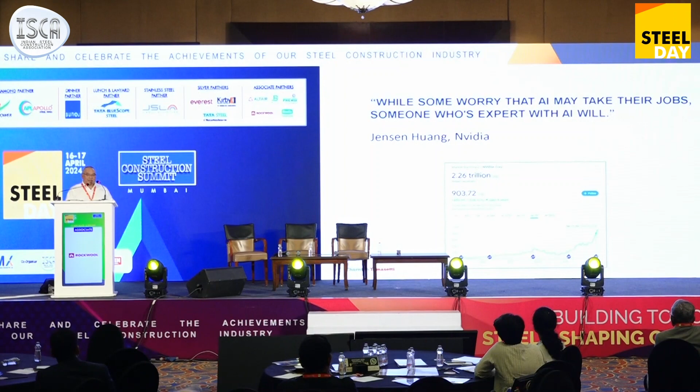So this is a statement from the CEO of NVIDIA, Jensen Huang, who says that while some worry that AI may take their jobs, someone who's an expert in AI will. And I think that's very true. He's growing his company at ridiculous speed, and there's no end in sight.

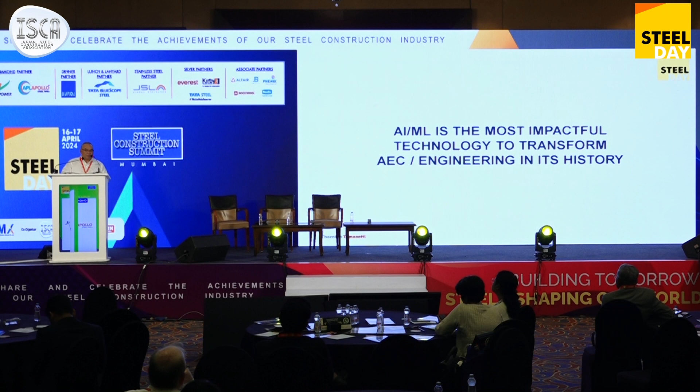This is my statement, having been an engineer for over 30 years now. It is the most impactful technology that will transform, and the reason why I say that, it's not just technical aspects, it's also marketing, it's going to also impact finance, human resources and recruiting. It's going to be spread throughout the entirety of the business of engineering.

So I want to show you some applications. And again, as I mentioned, at the crux of machine learning is data and data science, which is the part that trains the model. That's the artificial part, by the way. But the actual data, the solved solutions, are real. So if you can fit a very nice curve through a series of data, and then you ask that data a question, it gives you an answer from those solved solutions, and that becomes very powerful.

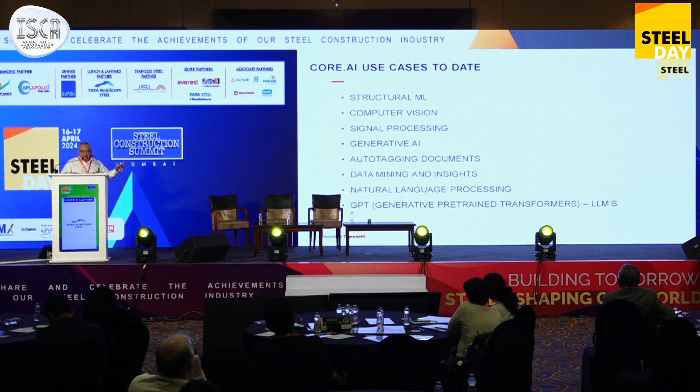So these are just the types of machine learning we've been doing and researching in our office. But I want to show you some. So this is 2018. We built a software called Asterisk. Asterisk was based on about 3 years of research that we had done.

And this designs a full high-rise building with a reasonable accuracy, probably 80 to 85% accuracy, in under a minute. All we needed was the massing of the building and the core dimensions, and it would design the building, either concrete or steel, using machine learning, all machine learning.

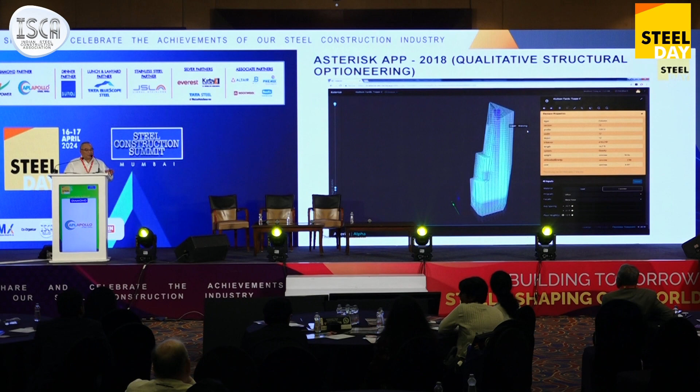The critical aspect of this is that what we wanted to do, and what was very new at the time in 2018, was something called qualitative analysis, or structural optioneering, as we called it. So instead of doing one design or two designs and then saying, okay, I'm going to take the best aspects of each, we can do 20 designs in a matter of hours, and then do a comparison of those 20 options to then optimize, if you will, that particular design and move on.

This example, what you see here is a building that we designed called 10 Hudson Yards in New York City. And in fact, the machine learning did show that concrete was the cheaper option, and that's the option that they actually used. Now, we did this study after it was designed, but it just demonstrated that this type of technology could be used and should be used in the future of engineering.

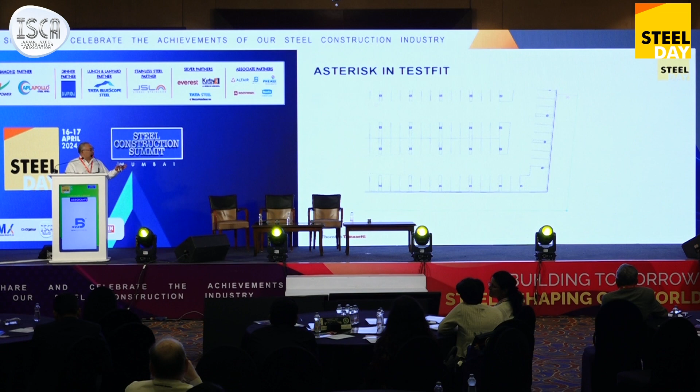Fast forward a few years after that, our machine learning model for concrete columns is embedded in a commercial software called TestFit. So this is a parking garage module that, as they're moving around the parking spaces and the dimensions of the columns and the number of floors, the columns are changing instantaneously. And I've checked those myself, so I know they're right.

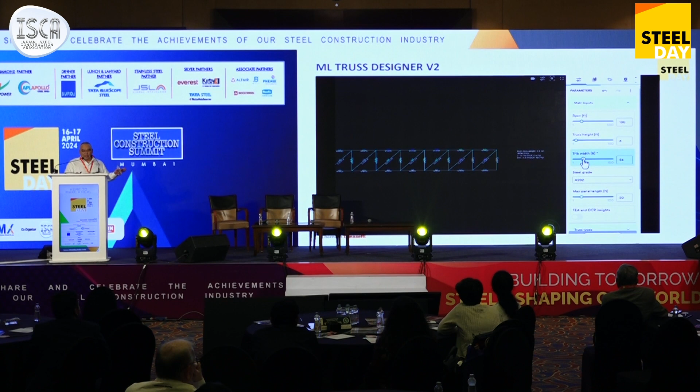So this is our latest truss designer. What this is doing is we actually built an FEA solver that is doing a structural analysis calculating the forces, but then pointing those forces to our trained models that design steel members and instantaneously resizing the members based on the geometry of that particular truss. Now, an engineer can do a truss like this in maybe a few hours if they're very good. This is doing it in a few seconds.

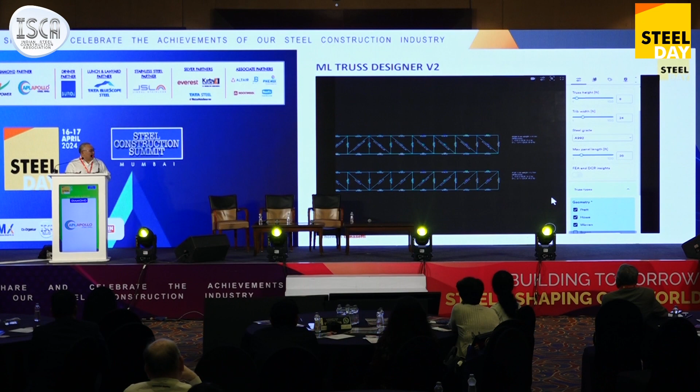And we can change the type of members with W10s, W14s, double angles, various geometric options. And this is near real time that you're seeing here in this video. And so the validation of these we do with commercial software. This is SAP 2000, a CSI product, and we're within 5%. And for those early phases of design, within 5% is absolutely, totally fine.

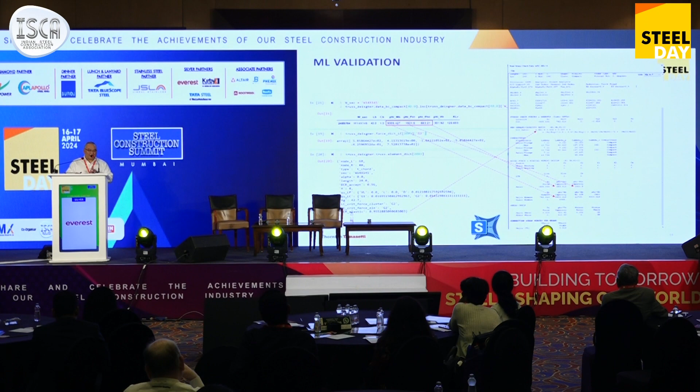We also do more conventional methods. This is called confusion matrix analysis of what the tool predicts versus what the answer actually is. And when you see these very clean 45-degree angles, that means the answers are almost always predicting what the data set we had.

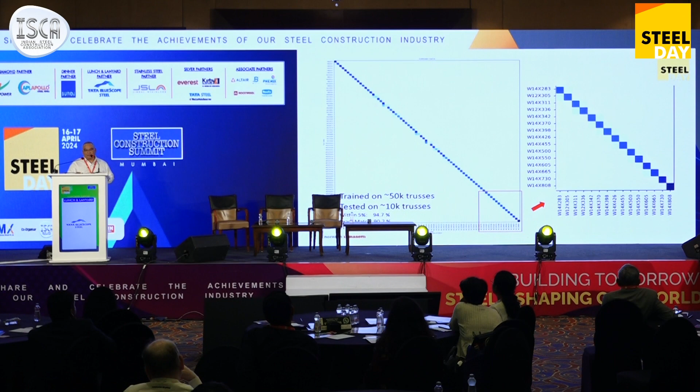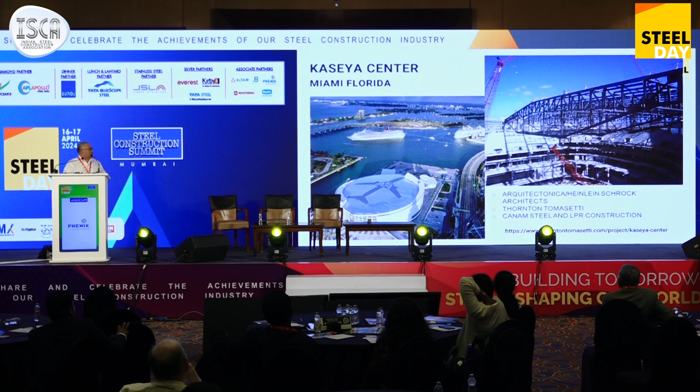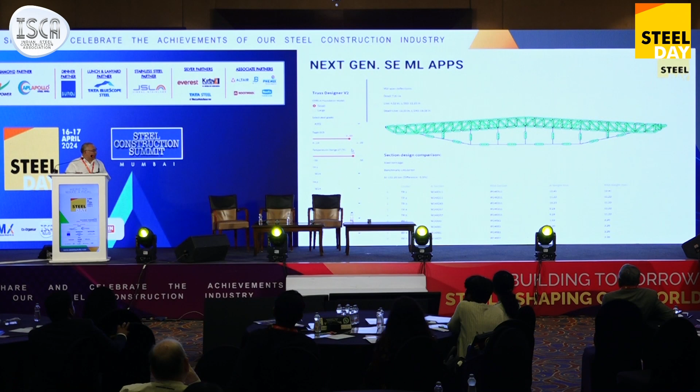This is a design that I did in 1997, or 98, I think it was, using 2D methods. It's in Miami, Florida. And it took me a long, long time to design this truss, I can tell you that. 372-foot span truss. We pointed that same analysis: we're doing an FEA in the background, calling our machine learning model for sizing of members, beam column trusses, and the analysis was within 5% of what I predicted, full design at CD level in 1997. So the power is there and the speed is there.

This is a ubiquitous concentric brace frame. This is a data set that we generated that calculates strength, stiffness, and optimizes using virtual work for this concentric brace frame. Each level has a family of member sizes. It's very advanced machine learning. And again, an engineer could do this in probably 6 to 8 hours or so, but we're doing it in minutes. Machine learning, by the way, is never 100% right. It'll get you close. But at early design phases, when it's very iterative, that's very powerful.

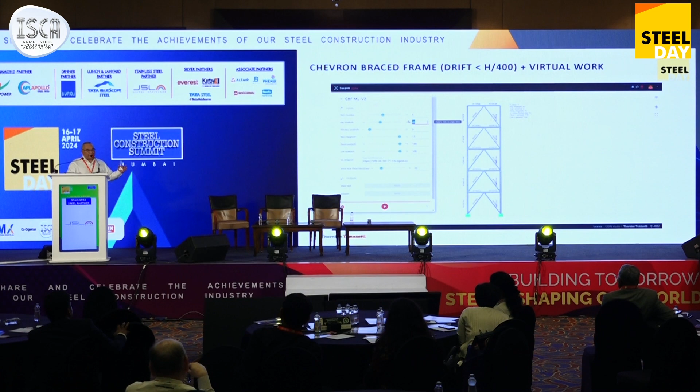This is office floor steel design that we trained using code-based results, but then fed it into a machine learning model. It understands corner bays versus exterior bays versus interior bays, and has the vibration analysis built into the results for office loading. And we can change the dimensions of those bays, and it instantaneously resizes. And the results are within less than 5%, actually, to real commercial software results.

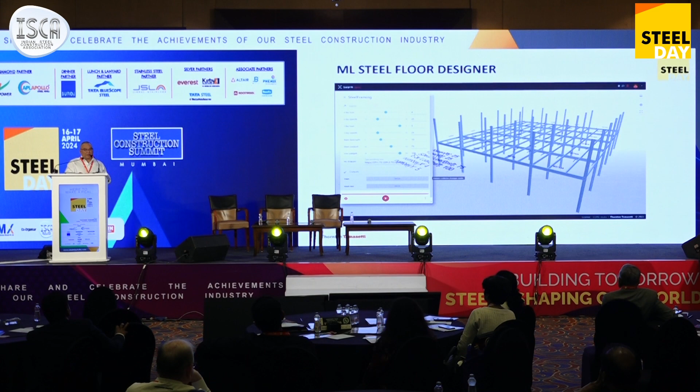So, full disclosure, we haven't completely rolled this out to the entirety of the firm. We are still testing with sort of the more advanced engineers in the office, because there is an additional aspect of AI that we need to train engineers how to use it and how not to use it. It's because it is not 100% correct. I would also argue that there's no engineering designs that are 100% correct anyway, but that's a different story.

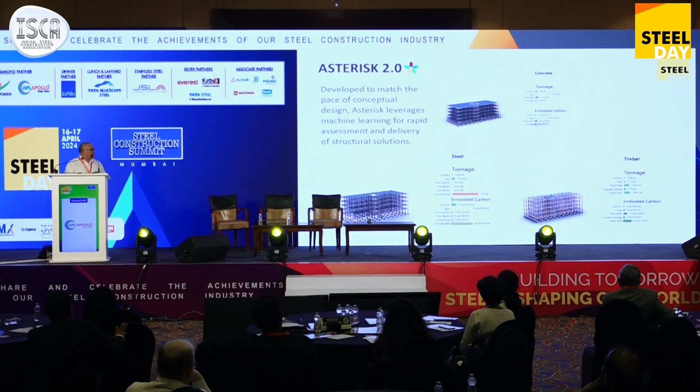So we have now trained timber, steel, and concrete for the majority of structural members, or almost all the structural members of a building, for both gravity and lateral. And as I mentioned, our software is now embedded in this other commercial software called Skema, which is a new startup that does, for now, residential design. But you will see here how it works. It's very much like our Asterisk in 2018.

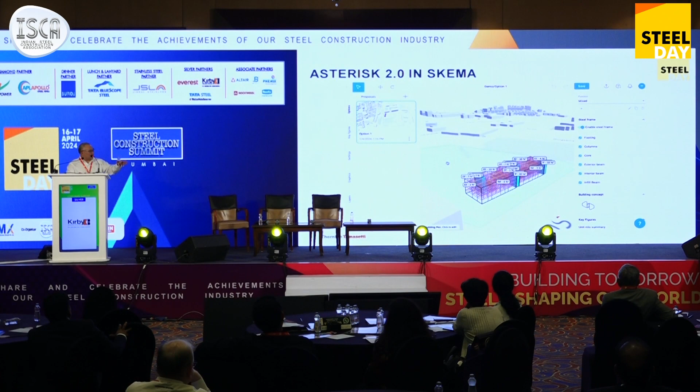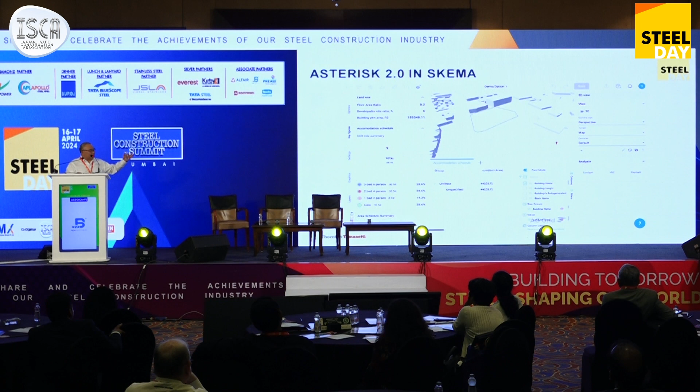It does a massing. It sort of splits the building up into 2 bedrooms, 3 bedrooms, and studios. It calls our machine learning models and instantiates the members in the building. So this is not meant to give the designer or the architect or the developer the exact member sizes. It's going to be about the depth of the member, the estimated weight of the structural steel. Again, we have concrete and timber as well if we want, but for now they have steel in there.

This is what I'm actually very excited about. So what we've done is, Thornton Tomasetti had a very vetted plate girder designer, and we took the logic out of the Excel spreadsheet, created millions and millions of results for plate girders, and now all we need to do is give a moment and shear.

I fixed it at a design capacity ratio of 0.8, and using generative AI, which is very much the technology behind ChatGPT, it's predicting any number of designs that actually work: deep members, shallow members, fat members, and we're post-processing and calculating the weight per foot of the members, as well as, for the engineers out there, the shear flow, so the weld that is required to make those members composite.

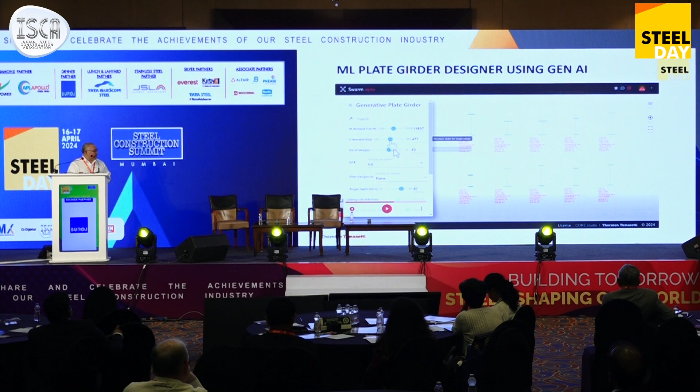So I think it was Anand who teed it up for me about AI predicting connections. This is a connection designer that we had using spreadsheets. We took that spreadsheet, created 10 million or so results, and now we trained a model that all we need to do is pick the shear, pick the member size, pick the bolt type, 3/4, A325, we would use A325 and A490 bolts, all different sizes, and it predicts the number of bolts. So some of you may say, oh, I can use a spreadsheet and do the same thing, and that is absolutely true. The power of AI, of these machine learning models, is we can do this for the entire building.

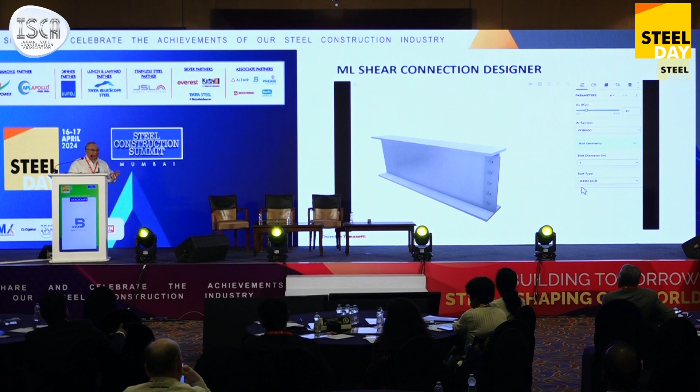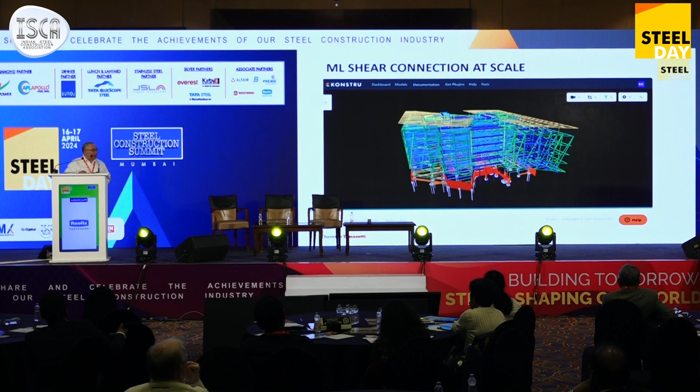And so this next example is a building I was the engineer of record for in New York City. It's called the Tata Innovation Center on Roosevelt Island. I took one floor, and we pointed that connection designer at one floor. We have the shears already in the model. And what this example is showing is, if you look down at the bottom, it's calculating the connection weight, the total number of bolts, and the total length of weld for the entire floor.

Now, a person can do that one by one, but it would take them a week to do, and we're doing it in seconds. And these are the types of things that fabricators want to know, and now we have a method of optimizing those connections before it gets to the fabricator, as a designer.

So this is just a proof of concept, but it shows you the power of what these models can do. They are not 100% correct, as I mentioned, but they work for a qualitative analysis, for getting a comparison. Now, the other thing you'll notice is that there's not a lot of disparity of shear forces in this model, so you're not going to see that many differences, but it just shows you what it can possibly do.

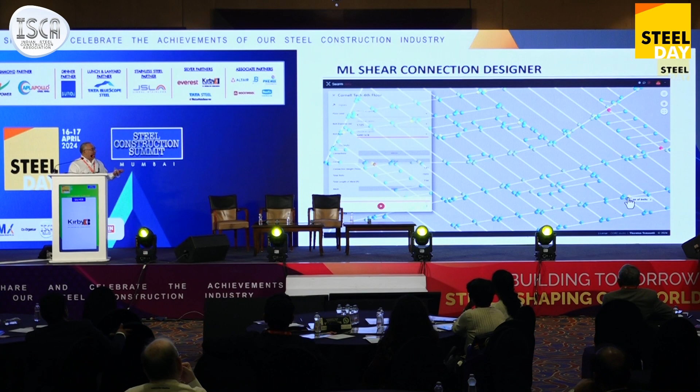I'm going to show this really quickly, not to get into it too much, but I want to talk about, we have a tool that does embodied carbon calculations.

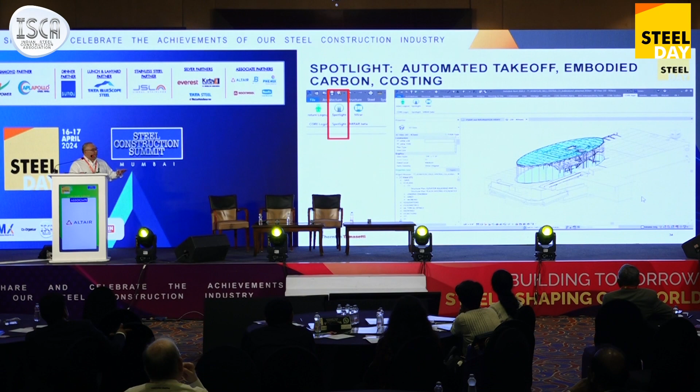It's an internal tool called Spotlight. We have an open source version called Beacon. The point of it is...

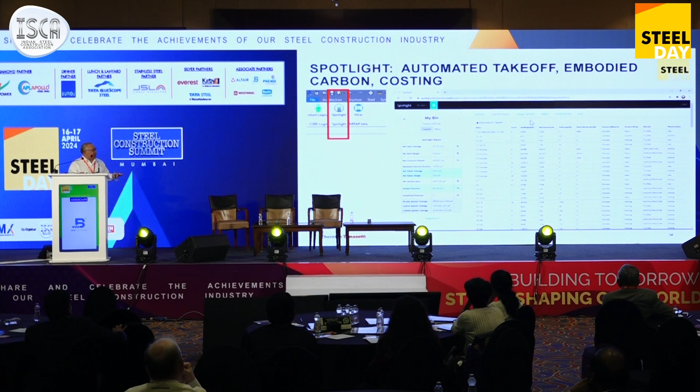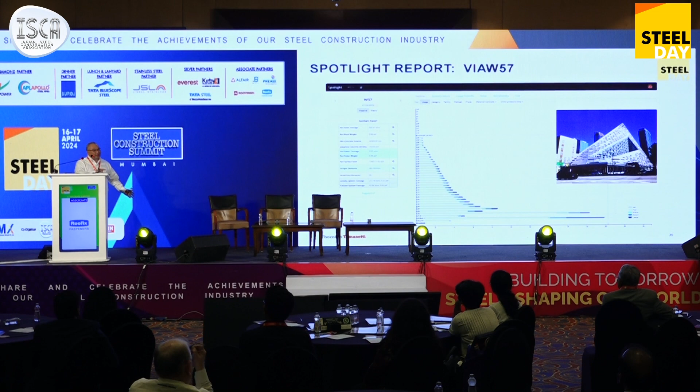This is another building that I worked on in New York City. What I did was just to prove to our young engineers that we don't need to build these full crazy 3D models. I did one bay or two bays of design using machine learning, one column or two columns, one footing, a couple of footings, just to get a sense of the overall weight of the building. I've done this before for competitions.

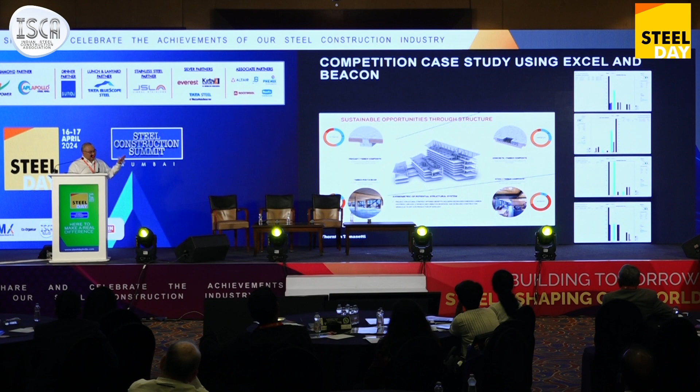This is a project that I worked on. We actually won this project. It's in Maine, for the Rue Institute. These are the key aspects of a building. If we can predict those elements to some reasonable accuracy, you don't need to do a full analysis.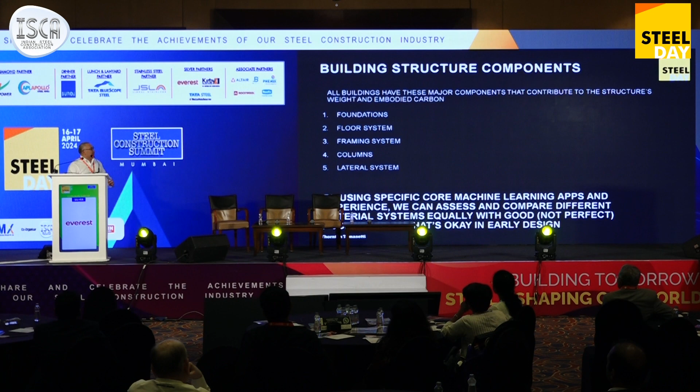This is my desire as CTO of the company, to instill in the young engineers that you don't need to do a full building analysis to give responses to your clients or architects and designers. You need enough information to be educated on the framing depth, the weight of steel, and potentially the cost as well.

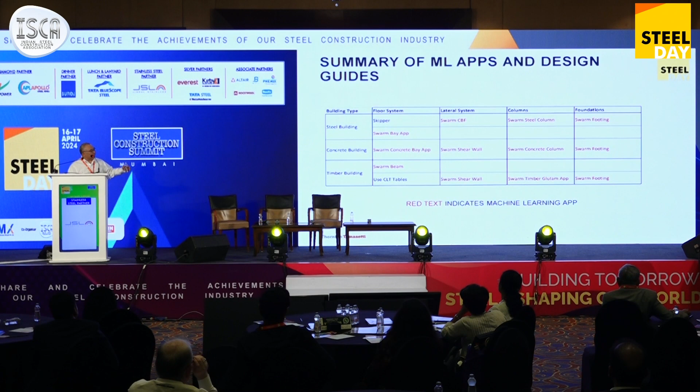So what you see here, the red is what we have machine learning models for. I'll go through this quickly, but just to show you what I did, which is the way we used to do it when I first started, because we didn't have the time or tools to do it. But if we can do these bay studies, column studies, foundation studies using machine learning, and then aggregate that for the entire building, you can get a fairly accurate design in hours versus days or weeks.

On the left is the model that I showed you, that's the machine learning model. On the right is a tool that we created that does actual non-machine learning CD level design. It's within 5%.

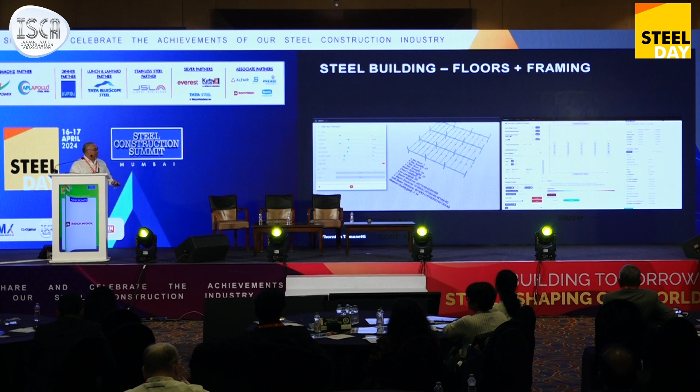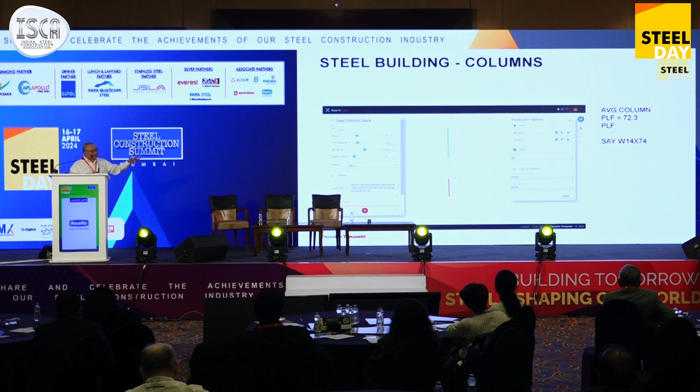This is one column designer. You can do corner column, exterior column, interior column, whatever you want to do. I decided to do one, and in this case I did one footing.

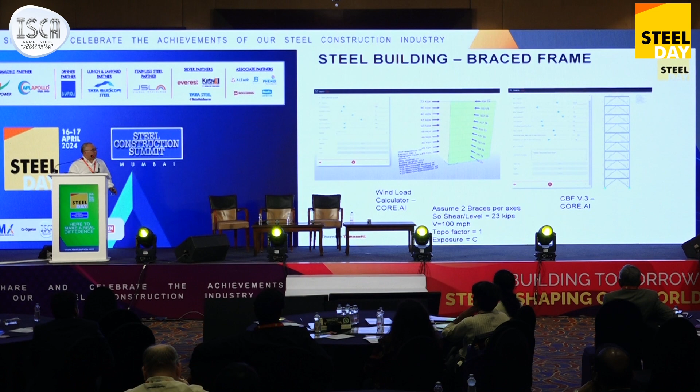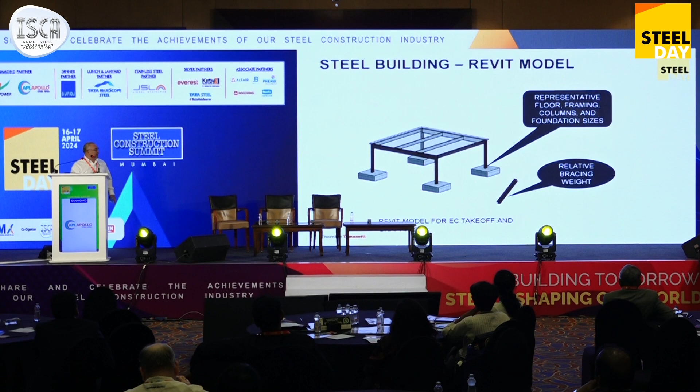We have a machine learning tool that actually does wind calculations and seismic. I took those loads and pointed it to our concentric brace frame machine learning model, and then I created this little dummy model in Revit, which is all we need for the prediction of the overall building.

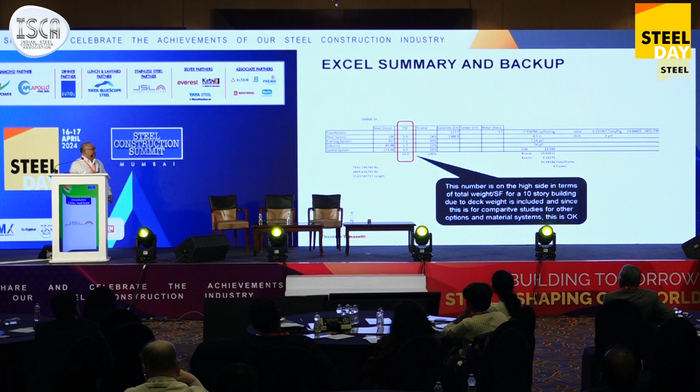Put it into Excel, and I'm getting pretty close. Subtract the 2 PSF, which is for the deck itself, not for the structural steel. So a 12 pound per square foot, 10-story, 100,000 square foot building is pretty close to being accurate. Instead of spending days and weeks, I can do it in an hour and have a good understanding of that building.

And then we have nice graphs to show the embodied carbon and things like that. The power of this is now you can chain these applications together to create a full building analysis. So what I did one by one by one, I chained it together and put it into a singular application. It's recalculating wind load, recalculating those column designs, footing designs, brace frames, and aggregating that into a full building analysis.

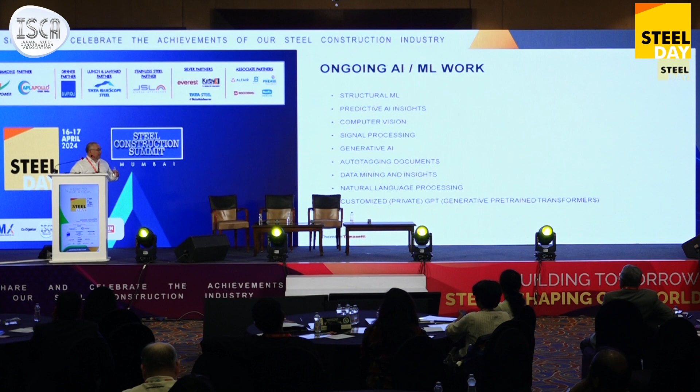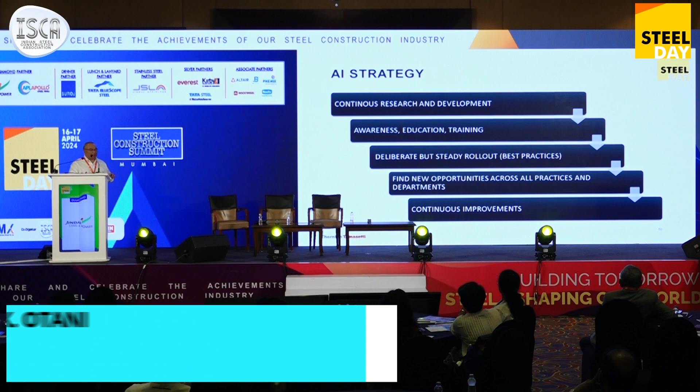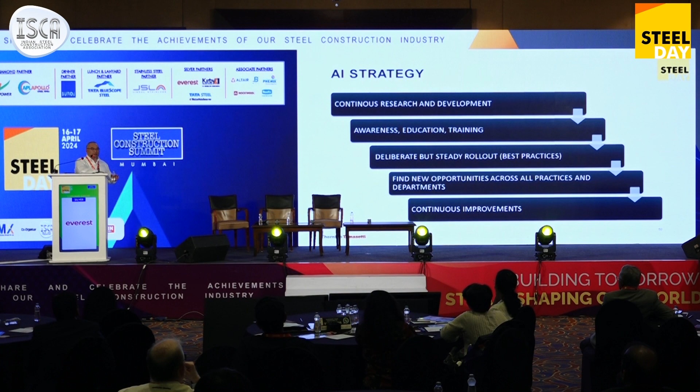So these are the things that we're doing. As I mentioned, the biggest aspect, particularly for a mature firm like Thornton-Tomasetti, is that we need to train the engineers how to use it correctly, because it's a new technology. It will require training, and people getting a good sense of what it can and can't do. But once they do, it will be a very accelerated early design tool. I don't want anybody using it for construction documents or anything downstream, it's for those early phases when there's an iterative process going on. Thank you.